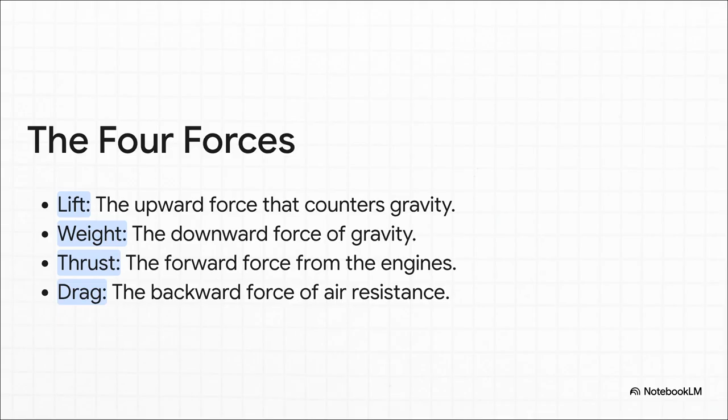You've got thrust, which is the engines blasting forward, fighting against drag. That's just the air pushing back. Then you've got the big one, lift, the upward push from the wings, which has to fight the plane's weight, which is gravity constantly trying to pull it down. For a plane to fly straight and level, those forces have to be perfectly in balance.

So that brings us to the million-dollar question. Where does that magical force of lift actually come from? Well, the secret isn't in the engines, it's in the absolutely brilliant shape of the wing. If you were to slice a wing open and look at it from the side, you'd see this shape. It's called an airfoil. And notice, it's not just a flat board. It has a special curve on top, and it's flatter on the bottom.

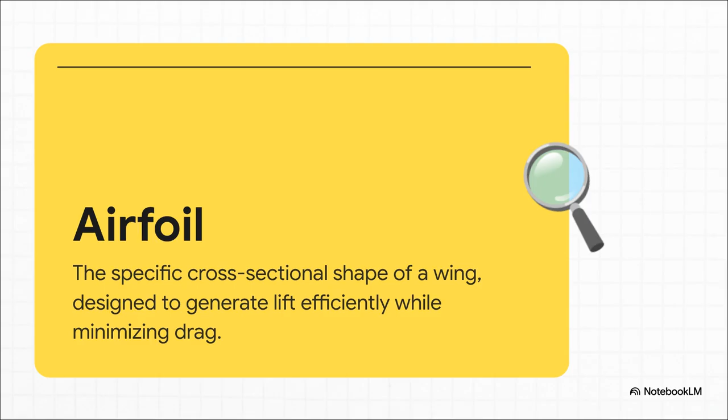That curve is everything. It makes the air going over the top travel a longer path, meaning it has to move faster than the air underneath. And that speed difference is the key to the whole operation. Now, not all airfoils are the same. A fighter jet built for crazy aerobatics might use a symmetric airfoil, but the plane you fly on for vacation, that uses what's called a cambered airfoil, with that signature curve on top.

Why? Because that faster-moving air on top creates a low-pressure zone. Meanwhile, you've got slower air underneath creating higher pressure. And what does high pressure do? It pushes up. That pressure difference, pushing up on the wing, that's lift. It's that simple and that brilliant.

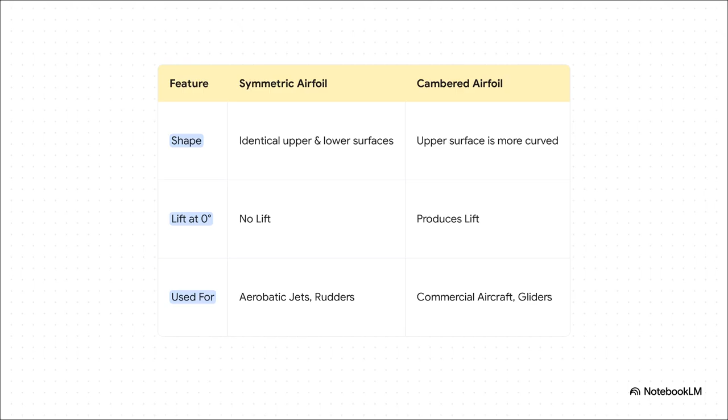Okay, so if the exact curve of the wing is so important, you know engineers aren't just sketching these things on a napkin, right? They need a rock-solid, precise way to define and share these designs. So how on earth do they do that? They use a system, and one of the most famous is the NACA code.

Let's crack it together. You might see an airfoil called a NACA 2412. That's not just a random number, it's a recipe. The first number, the 2, tells you the max curve, or camber, is 2% of the wing's front-to-back length. The 4 tells you that the highest point of that curve is 40% of the way back. And the last 2 digits, 12, mean the wing's thickest point is 12% of its length. It's like a secret code for creating the perfect wing.

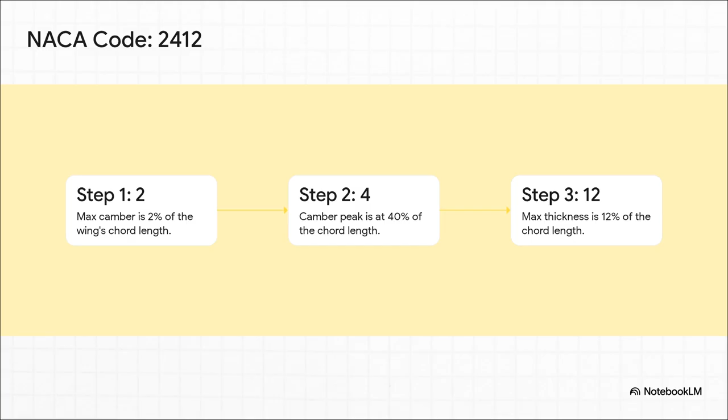But here's the thing. A wing can only generate so much lift. You can't just keep asking for more and more and more. If you push it too far, you can get into a really dangerous situation where the lift just disappears. It's called a stall.

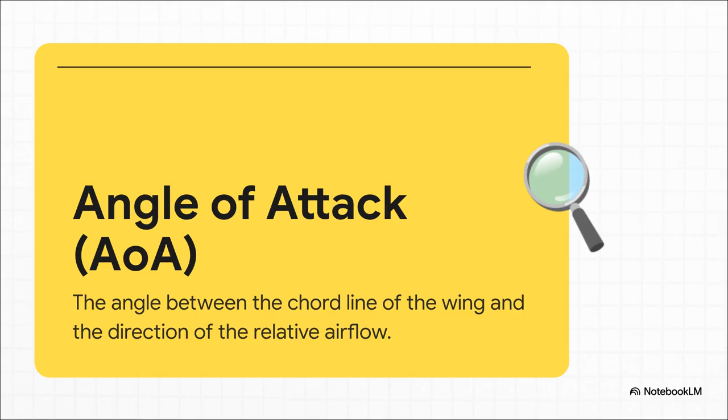To get what a stall is, you need to know about the angle of attack, or AOA. It's just the angle between the wing and the air rushing towards it. A pilot can increase lift by pitching the nose up, which increases that angle. It works, but only up to a certain point.

So picture this. The pilot pulls back on the stick, the nose goes up, and the lift gets stronger. Great. But if they keep pulling back, they hit the critical angle of attack. That's usually somewhere around 16 to 20 degrees. Tip the nose just a tiny bit past that point, and the air can't follow the curve of the wing anymore. It separates, becomes turbulent, chaos, and poof, the lift is gone.

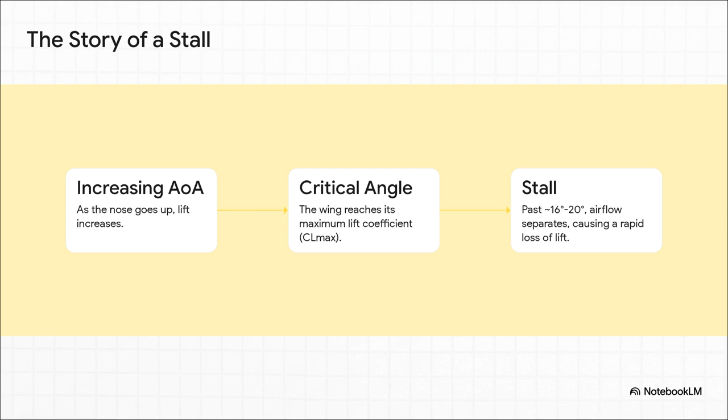And this is so important to understand. A stall has absolutely nothing to do with the engines. The engines could be running at full power. A stall is purely about the wings losing their grip on the air. It's an aerodynamic problem, and it's why pilots train endlessly on how to avoid it and recover from it.

This all leads to another question. If you need speed to generate lift, how does a gigantic airliner get off the ground when it's moving pretty slow on a runway? How does it land slowly without stalling? Well, it gets a little help from some clever engineering. That help comes from what we call lift augmentation devices.

And if you've ever sat in a window seat over the wing, you know exactly what I'm talking about. It's those loud whirring and grinding noises you hear before takeoff, as you see parts of the wing literally extend and change shape. They are temporarily reshaping the wing to make more lift at low speeds.

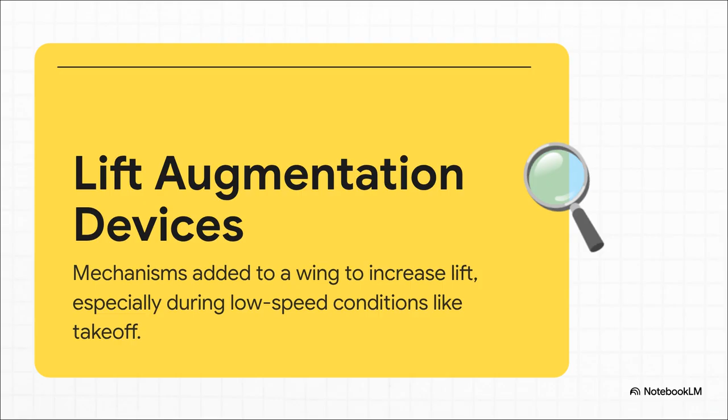Our high-lift heroes are two main devices, slats and flaps. Slats are on the front, or leading edge of the wing. They pop out to let the wing fly at a higher angle without stalling. And flaps extend from the back or trailing edge. They basically make the wing bigger and more curved, which squeezes out every last ounce of lift possible.

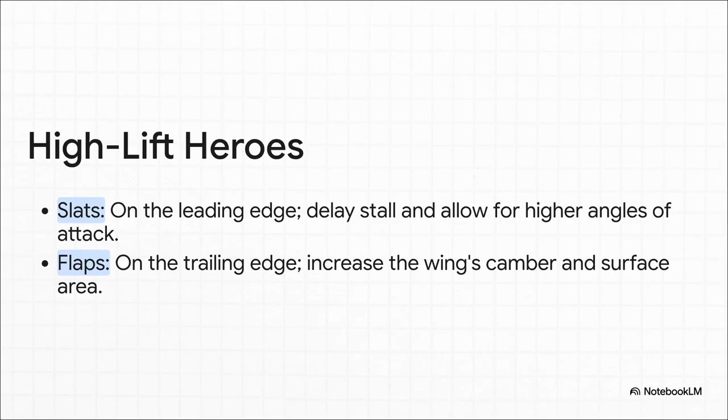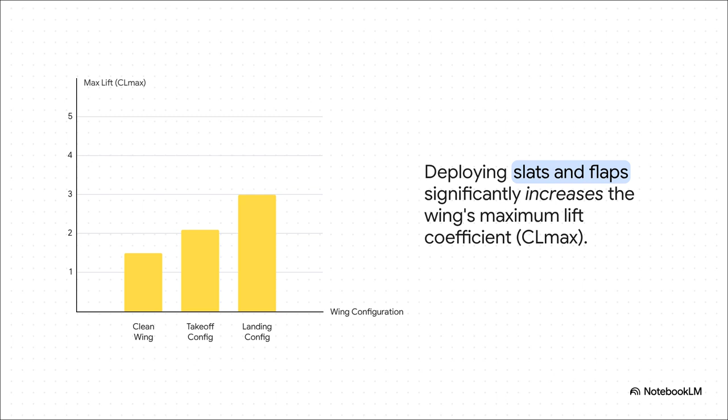And the difference they make is just incredible. Look at this. A clean wing, all tucked in for cruising, has a certain amount of lifting power. But deploy the flaps and slats for takeoff, that power jumps way up. And for landing, with everything hanging out, they can literally double the wing's lifting power. That's what allows a massive jet to approach the runway at a safe, manageable speed.

Okay, so we know how to get in the air and how to land safely. Now let's talk about going fast. And I mean really fast. The kind of speed where the air itself starts to behave differently, and you run up against the sound barrier.

When you get into these high-speed regimes, you stop talking about miles per hour. Instead, everyone uses the Mach number. It's super simple. It's just your speed compared to the speed of sound. So Mach 1 is the speed of sound. Mach 2 is twice the speed of sound, and so on. It's the universal language for flying fast.

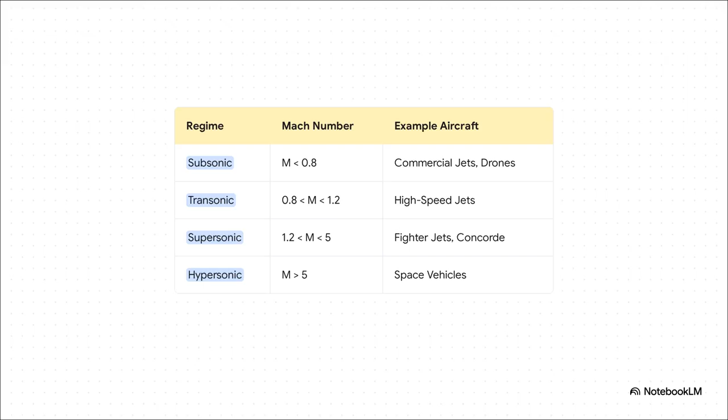So you see, flight is this amazing dance. It's a dance between 4 forces, between speed and shape, between human ingenuity and the laws of physics. We've managed to harness these invisible forces to do something that once seemed impossible, which really makes you wonder, what other invisible forces are out there, just waiting for us to figure them out?